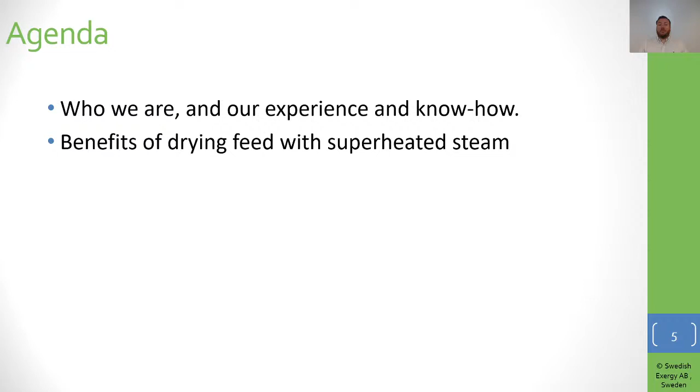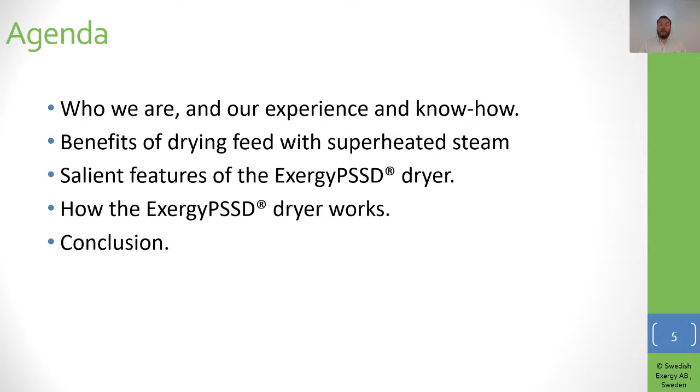Just want to quickly go through the agenda today. First, we'll touch base a little on who we are and our experience and know-how. Then the benefits you'll receive by drying animal feed with superheated steam, and the salient features of our Exergy PSSD dryer. Also how our Exergy PSSD dryer works. And at the end, a conclusion before we move to questions.

Let's begin. So who are we and what do we do? Swedish Exergy are the inventors of the superheated steam dryer. We are an engineering company based in Gothenburg, Sweden, and we invented the superheated steam dryer in the beginning of the 1970s. In 1979, we delivered our first dryer, which is still today, over 40 years later, operable. We did replace it with a new, larger dryer with double the capacity, but the old one still remains and acts as a backup dryer.

We are a global company with subsidiaries and sales reps worldwide, and we have also executed projects globally. Our core business is dryers, but we also supply evaporators and rotary valves.

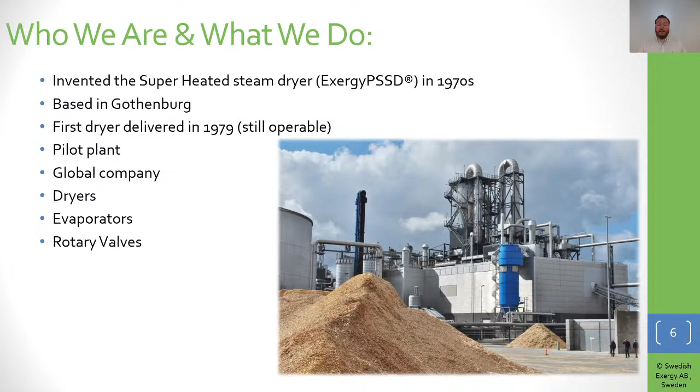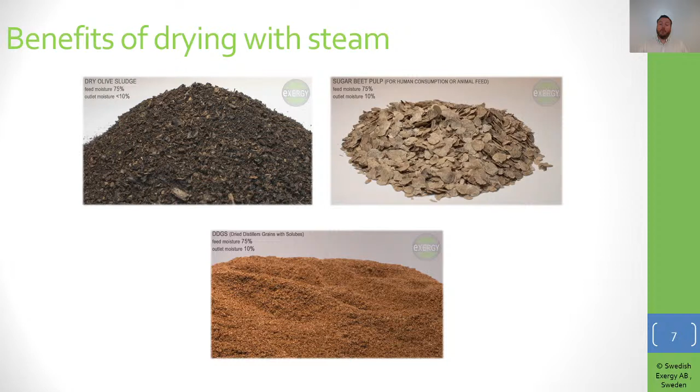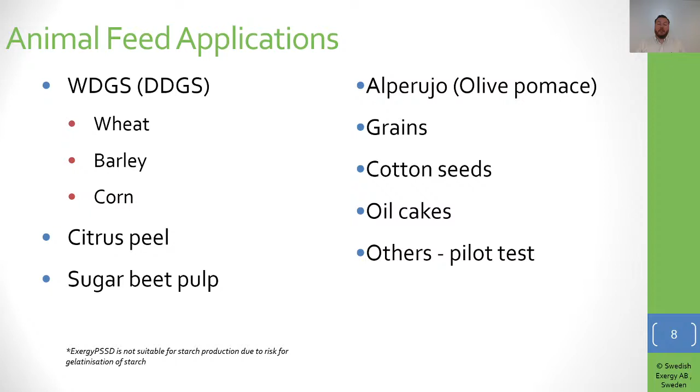Let's talk about the benefits of drying with superheated steam for animal feed. Some of the products we have experience with, either tested in our pilot plant or through commercial plants, include wet distillers grains with solubles from wheat, barley, and corn. We also have ongoing projects for citrus peel, sugar beet pulp, olive pomace, grains, cotton seeds, oil cakes, and others. We welcome all companies to send us samples so we can perform a mutual pilot test to see what benefits you'll receive.

So what are some of the advantages of drying animal feed with superheated steam? The main advantage is that you're able to achieve bypass protein without any chemicals at all. This is because when the protein is exposed to and dried in superheated steam, we change the molecule structure to a less water-soluble one, allowing it to bypass the rumen of the cattle. In fact, more than 50% of this protein bypasses the rumen to be taken up in the intestine instead, hence the word bypass protein. But we still maintain intestinal digestibility, which leads to increased milk and meat production because the animal gets healthier and gets more protein.

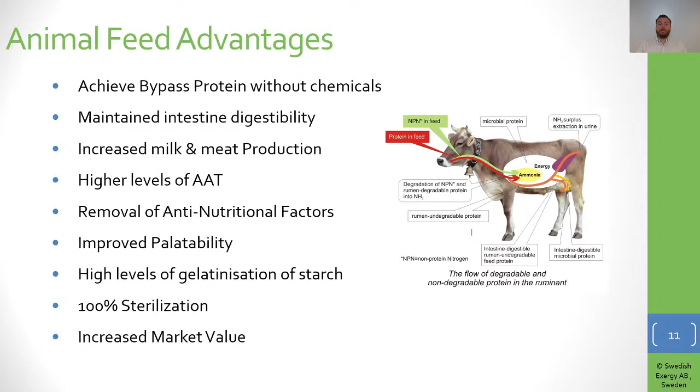We also get very high levels of AATs and amino acids, removal of anti-nutritional factors, improved palatability, and since some animals have a hard time digesting very starchy feed, drying in our dryer produces very high levels of gelatinization, helping the animal digest the starch and feed better. One main benefit is that all feed dried in our superheated steam dryer gets 100% sterile, with no traces of any bacteria, salmonella, or anything else. We've done independent testing to verify that this claim is true.

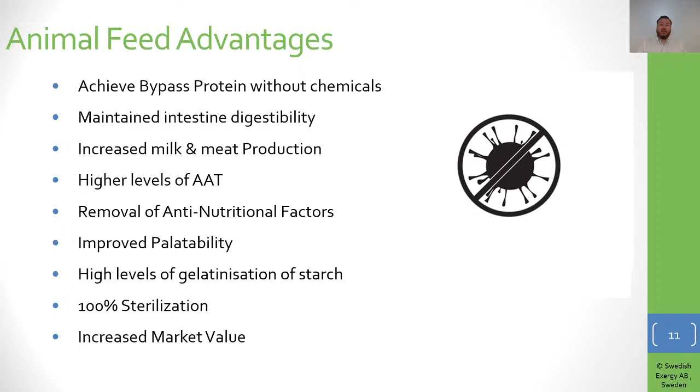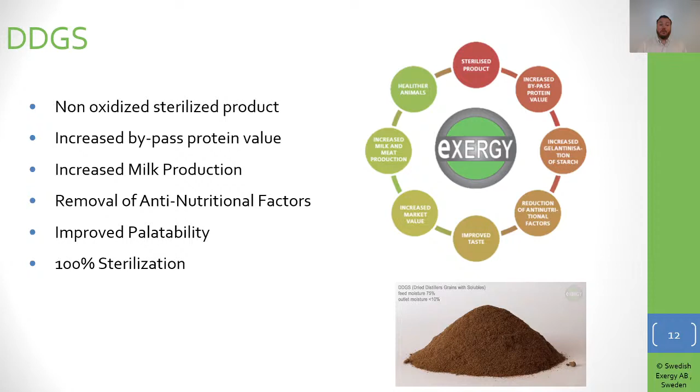All in all, this leads to an increased market value of the feed itself. The same goes for DDGS - the same benefits apply, including bypass protein, sterilization, and all of that.

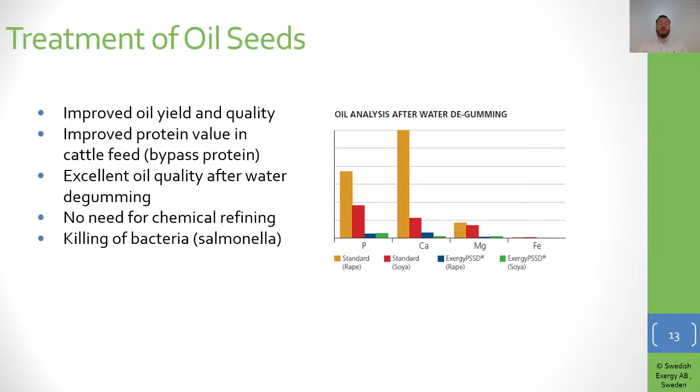As a side note, I'd also like to talk a little about processing or conditioning of oil seeds. We don't necessarily dry the oil seeds, but we condition them in superheated steam. You still get the benefits we talked about, like increased bypass protein and no bacteria growth since it's sterile. But you also get improved oil yield and quality - great oil quality after water degumming, with no need for any chemical refining, which makes the whole process a lot simpler and cost effective.

Here's an independent study done by the Swedish Agricultural University on the differences with feed dried in our dryer compared to conventional dryers. I'm not going to go through the whole study, but it is available, and you can contact us if you would like to know more.

What I would like to highlight is the increase of AATs and amino acids. In this case, you can see the high increase of AATs, which is amino acids available to the small intestine. But at the same time, we also get very low PBVs, which is rumen protein balance.

You can also see in the lower part that we don't really change the characteristics of the feed itself. We're actually able to increase the intestine digestibility by a small margin as well.

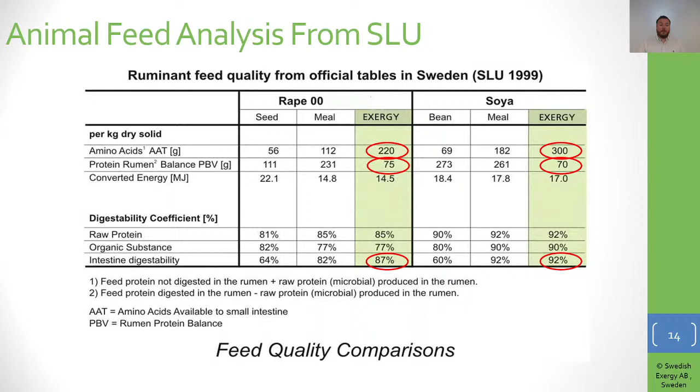So now that we talked a little bit about the benefits received when you dry animal feed with superheated steam drying, we would like to talk about the other features you receive by using a superheated steam dryer compared to a conventional dryer. We'll talk about our Exergy PSSD, the Exergy pressurized superheated steam dryers.

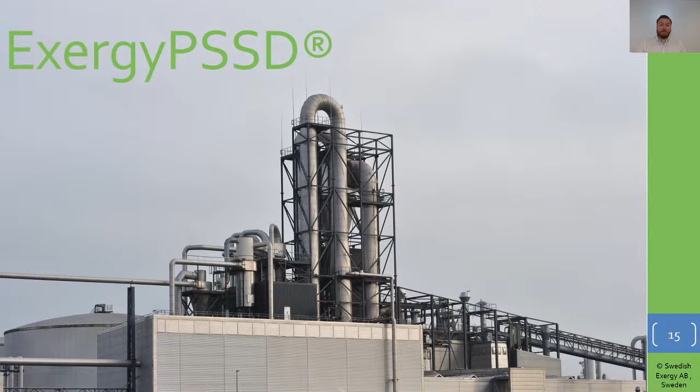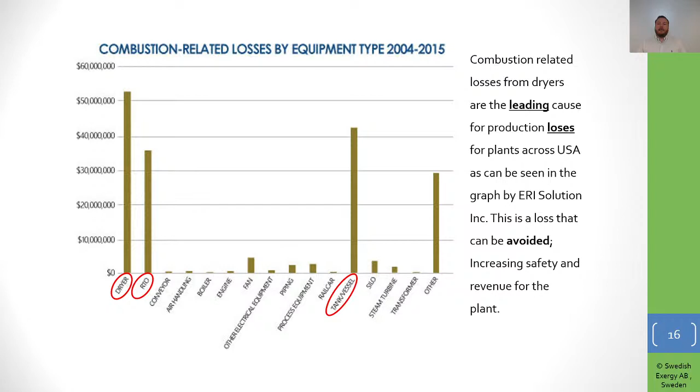It's started to become kind of a standard within this industry that if you have a dryer, well, you kind of have to expect that you might have a fire at some time. It even goes so far that some of the dryer manufacturers actually say, and I quote, 'All dryers are going to have a fire, and anyone saying anything different is a little bit too optimistic,' end quote.

Well, I guess we are a little bit too optimistic then, because we don't have any fires, we don't have any explosions. They can't happen within our dryers. And you're probably wondering, well, how are you able to achieve that? It's actually quite simple.

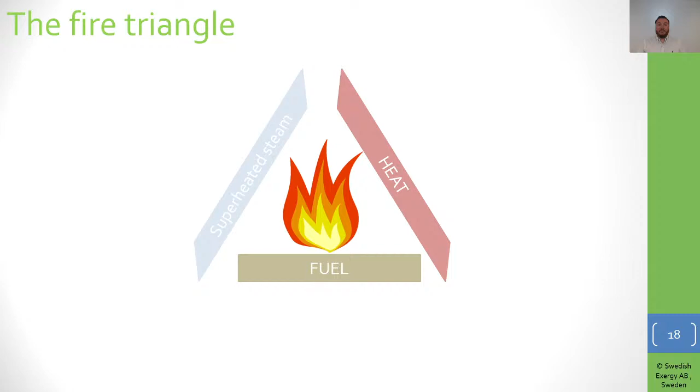I'm pretty sure a lot of you are familiar with the fire triangle. It describes the 3 things that fire needs to survive: it needs oxygen, it needs heat, it needs fuel. Well, within our superheated steam dryer, we don't have any oxygen. We displace all of the oxygen within the dryer with superheated steam to get a complete inert atmosphere, which in turn means we don't have any risk for fires or explosions.

This, of course, leads to a lot of benefits. One of the main things is, of course, the safety aspect, both for the workers and for the plant itself, that you don't have to worry about any fires or explosions, but also a lot of monetary benefits. You don't need any spark detection system or fire prevention systems. It's also a lot lower insurance cost.

We actually heard from some feed producers that it's hard for them to get insurance on their dryers because the chances of fires are so great. But with our dryers, it's fairly easy and the insurance is very low. Also, since there's no fire or explosion risk, there's no need for any ATEX classification of our dryers, which makes the approval process and permitting a whole lot easier.

And talking about permitting, since we are using a closed loop design of our superheated steam dryer, we don't have any air emissions, VOCs, or odors released to the atmosphere. This also makes it a lot easier to get all these permits, to follow all the regulations. In fact, we actually have a dryer that's placed right in the middle of the city, and there hasn't been any complaints or problems whatsoever.

If you think back to the bar chart of causes of monetary loss for feed producers, RTO was in the number 3 spot. Since we're using a closed loop design, there's actually no need for an RTO or any other type of off-gas treatment. We're also extremely energy efficient. We can recover upwards to 95% of the energy that's put into the dryer. I'm going to talk a little bit more about that later.

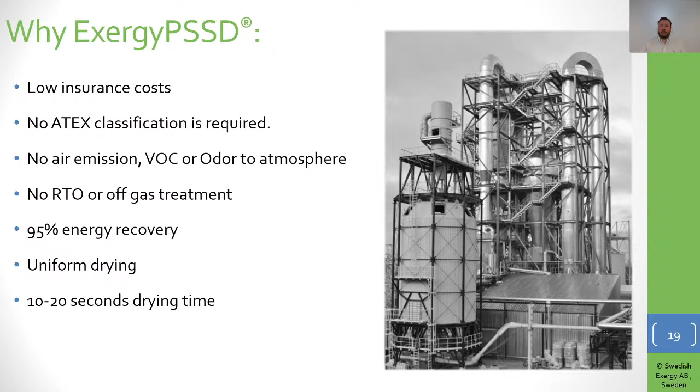I also get a very uniform drying, since all of the wet particles are suspended within the drying media, which is superheated steam. The whole drying process from feed to discharge takes only about 10 to 20 seconds. We also know that land is expensive and scarce, so that's why we're building on height rather than width.

Another main benefit is that we're using indirect heating, which opens up a whole lot of various heat sources available to power the dryer. For example, you can use natural gas, hot gas, electricity with an MVR, of course steam, high pressure steam, and we can also use thermal oil.

Since we have very few rotating parts, we get very low running and maintenance costs, and we can achieve very high levels of dryness. We have a very long life cycle. Like I mentioned in the beginning, our first plant built in '79 is still operable today. And due to our energy recovery, we have a very fast return on investment.

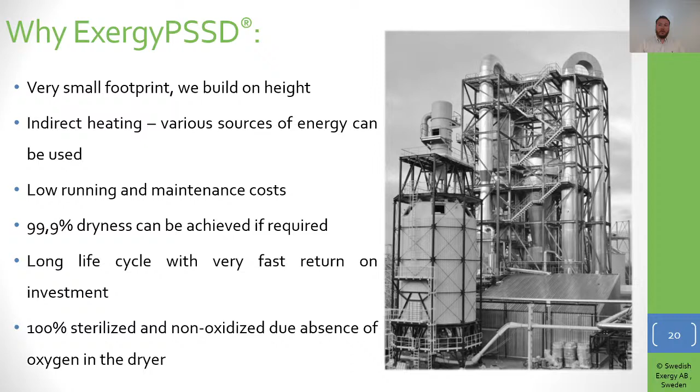And it's not only feed or animal feed that gets sterilized. All product gets sterilized and non-oxidized within our dryer when you dry it.

I'm sure a lot of you have questions on how we can achieve this, and we'll be happy to book a meeting to explain this in more detail. We can also integrate a carbon capture system to achieve even better results than this.

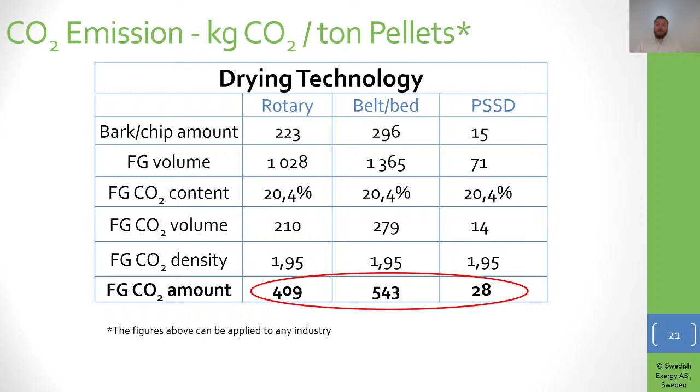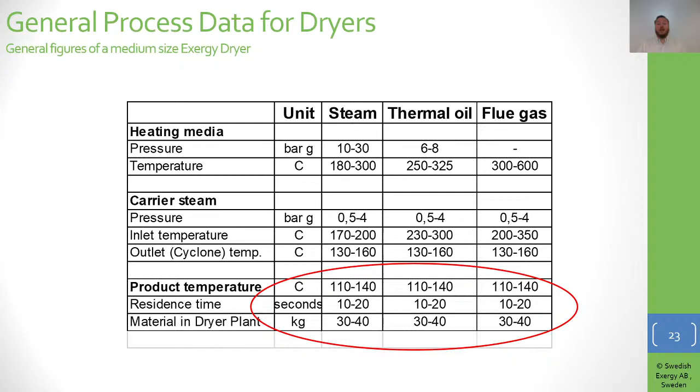But what you have to keep in mind is that the product only gets exposed to this temperature for less than 20 seconds. When we conducted testing on our pilot test, we found that because of this short residence time, it will not affect any products negatively.

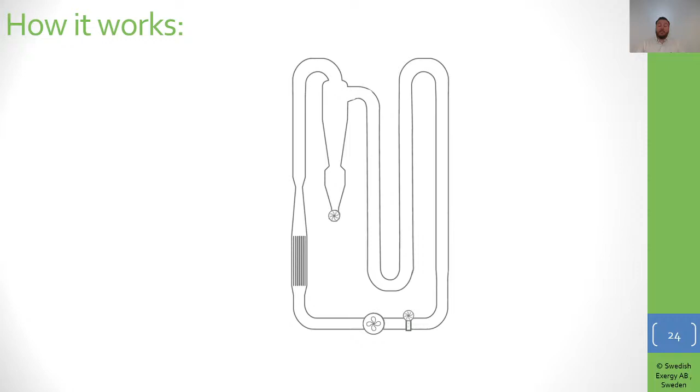I just want to explain a little bit about how our Exergy PSSD dryer works and operates. Like I mentioned, we're able to heat it indirectly. For this example, to highlight that, I'm using thermal oil at 280 degrees as the heat source. We're starting by heating up the dryer with this thermal oil to operating temperature.

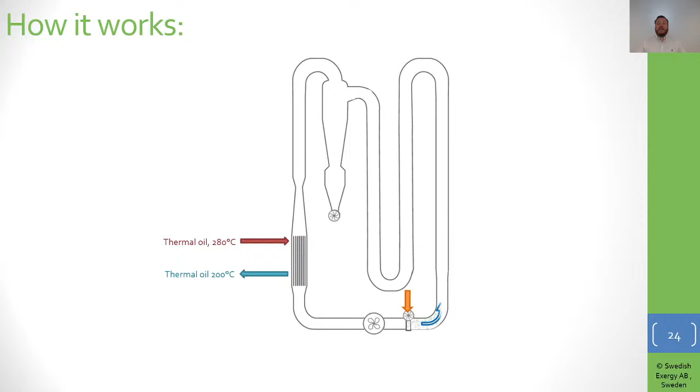Then we start spraying in some water to displace all the oxygen present with superheated steam, before we start feeding any product. Then we start feeding in product, and here the wet product meets this superheated steam that both carries and dries the product at the same time until it reaches our cyclone.

In our high efficiency cyclone, the now dry product gets separated from the steam and gets discharged at the bottom through our rotary valve. And all of this, from feed point to discharge point, only takes 10 to 20 seconds.

The steam that gets separated from the dry product then continues through our drying ducts to our bleed-off valve, and this is where we get our energy recovery from. Since we're constantly drying wet material, we're constantly evaporating water, which turns into steam within our dryer, and we keep building up the pressure.

We want to maintain a constant pressure in our dryer of about 2 to 2.5 bar gauge. So in order to be able to maintain this pressure, we need to bleed off some of the steam constantly, and this is what we're doing here.

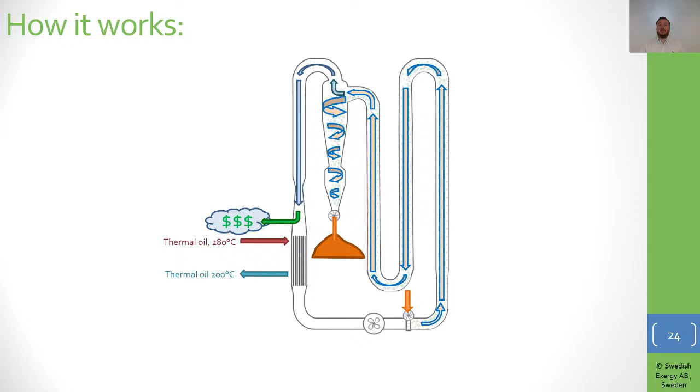This steam can then be used for other processes in your factory, for example distillation columns, evaporators, can be used in condensing turbines to produce electricity, or it can be used for heating purposes. There's a lot of possibilities to regain some energy here.

The steam that didn't get bled off then goes through our superheater again, gets superheated through our main circulation fan, meets the wet product, and the cycle continues.

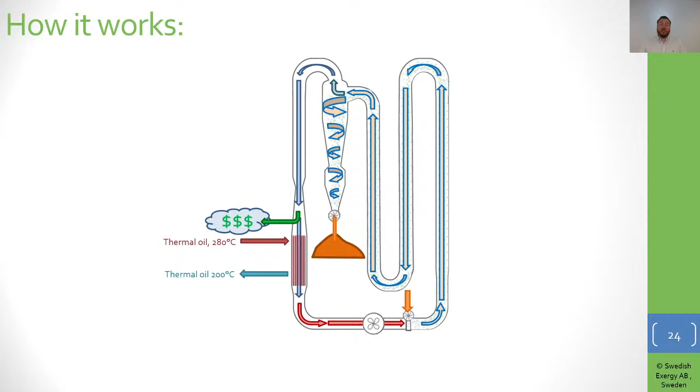One thing we get asked a lot from clients is, what about room for a little bit of expansion in the future or increase of capacity? We know that this can be a problem with conventional dryers that normally have a fixed capacity. Well, with our dryers, we have something we call a loop heater, which enables us to increase the capacity at a later stage by only adding one component, by about 40%.

We have a client in Turkey at the moment, which we're supplying a dryer for, and they know that in a few years' time they will have to increase their capacity, and hence why we are the perfect choice, because they can later on add a loop heater to increase the capacity by about 40%.

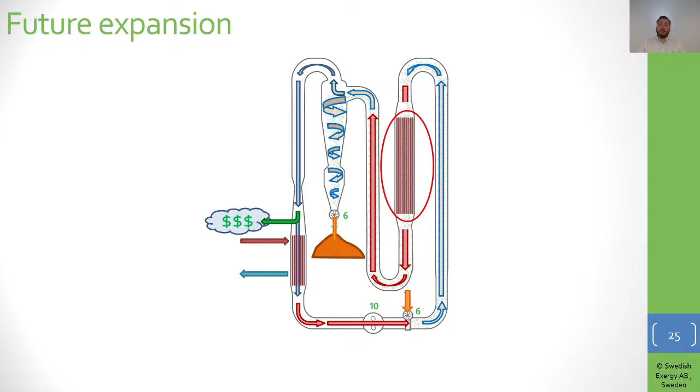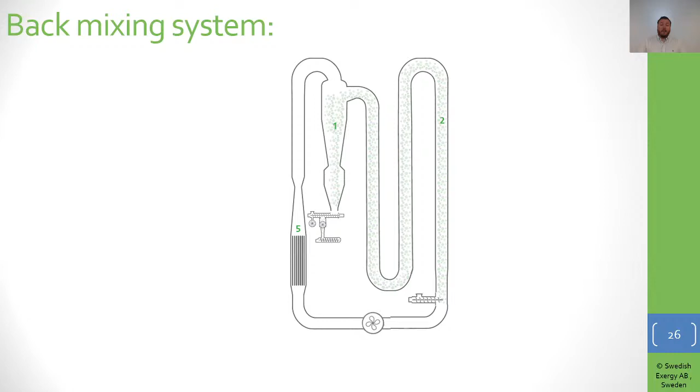We also get a lot of questions about very wet materials or very sticky materials like DDGS. Well, then we have a back mixing system where we pump the sticky or very wet material into a mixer. It gets mixed with some of the dry material from the cyclone before it gets fed into the dryer.

Then the product gets dried like normal. The only difference is at the end of the cyclone, some of this dry material gets back mixed with the wet material, and the rest gets discharged as dry product.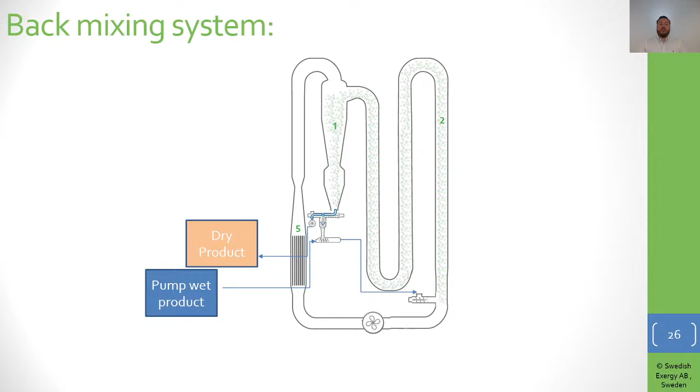To conclude this webinar, I would just like to summarize a little bit about what we talked about. We talked about the benefits that the animal feed will receive when dried in a superheated steam environment: the increase of bypass protein, the sterilization part, the increase in market value, and a lot of other good benefits.

The benefits of using our Exergy PSSD dryer compared to traditional or conventional dryers are the no risk for fire explosions, the tremendous energy efficiency, but also the short residence time and the sterilization of the product.